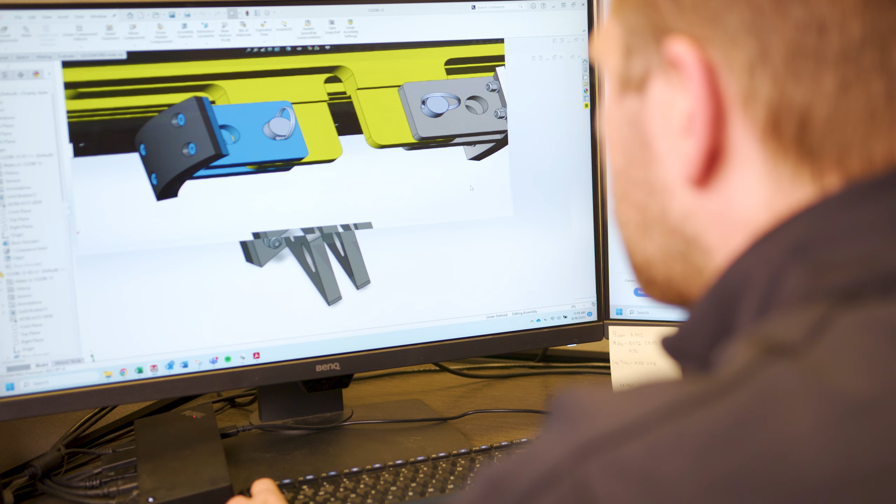My name's Dan Sherwood. I'm a below the hook product specialist based out of our Cleveland, Ohio location. My name is Dan Fisher. I'm a design engineer with the Below the Hook group. And on this specific project, I was tasked with designing this lifter based off a design that the customer already had.

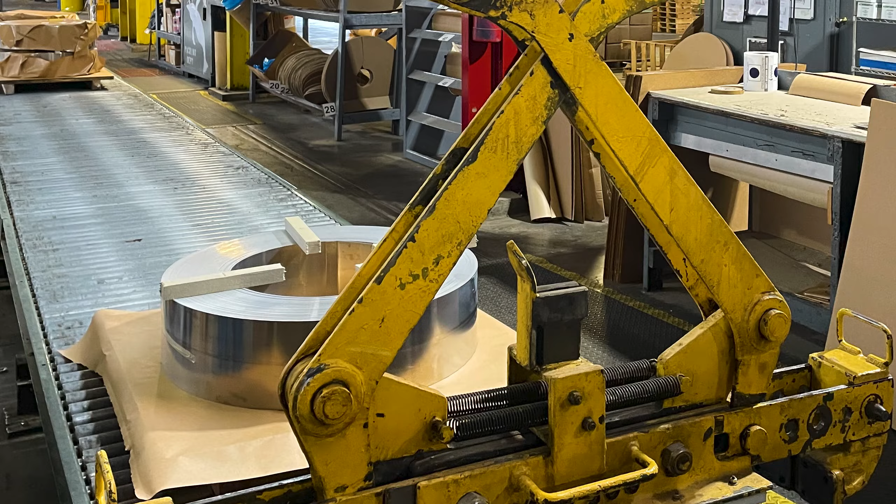So the situation we came into in this one was one where the customer was lifting coils of steel, but instead of the coils of steel being in the vertical position, they were laying down in the horizontal position, which is a much more challenging pick to do. There's fewer options out there to do something like that. Again, most of those are designed to kind of go in and help stand that coil up to move it, whereas this customer wanted to leave the coils in that horizontal position.

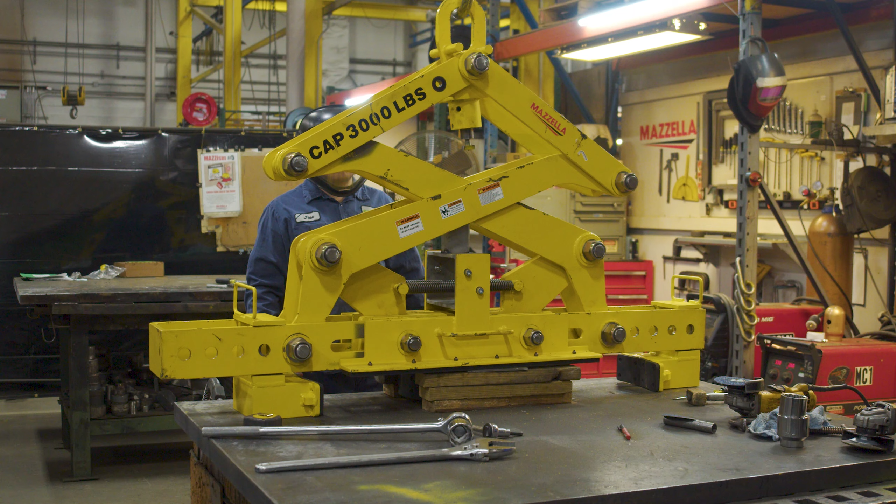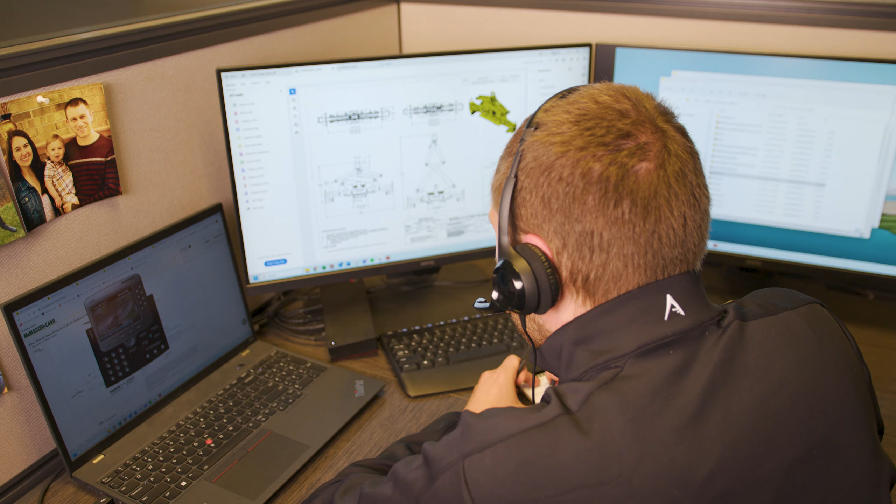So what we needed to come up with was something that we could go in and grab that coil, pick it up and move it, but the problem is as it's a coil of steel, if you just kind of pick up and push on the ends, as you lift it up, you're gonna have a telescoping effect where the center of the coil can fall out. So what we had to do was come up with a device that would apply the correct amount of pressure to both the outside and the inside that would keep that coil bound together, but at the same time

not damage the coil. It was determined that they wanted something very similar to what they had. And with Dan Sherwood's experience, as well as other engineers on the team, we were able to put together something that replicated what they had, while also giving them a brand new lifter that they can use in the future.

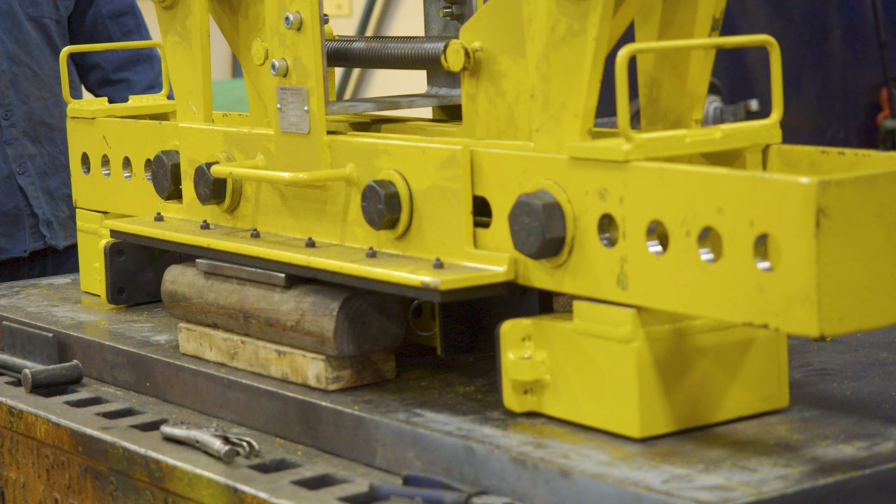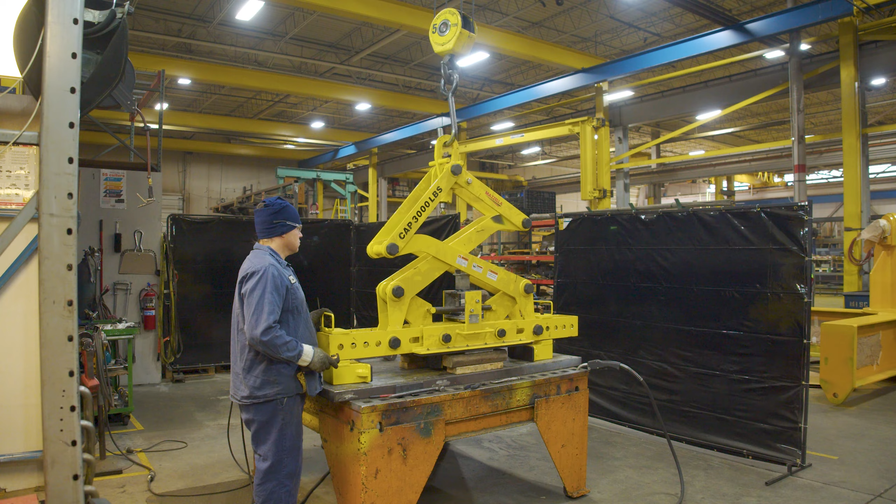Some of the challenges we encountered were having different outside diameter and inside diameter coils, and having the tong be able to work for a couple different size coils. The engineers got really creative with some adjustability features in the tong to allow us to pick up different size coils on it. Definitely a lot more moving parts, a lot of tong arms moving different directions all at the same time. Whereas a lot of the stuff we do is just a standard lifting beam with no moving parts. This definitely took the moving part to the extreme.

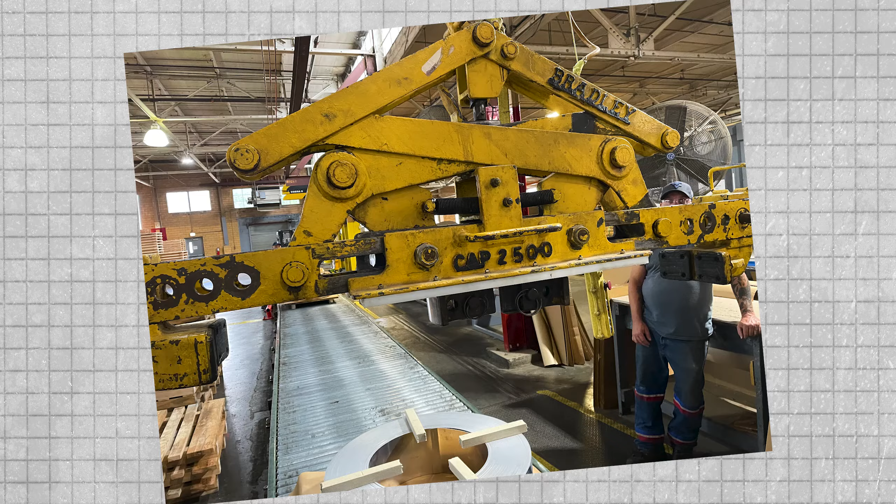To get this device designed, it required a site visit onto the customer's facility to gather a bunch of measurements. We had not much to go off, just a couple pictures and a few dimensions. Then from there, I looked at the pictures and kind of eyeballed how big the thing should be, while also making sure it fulfilled the calculations required by BTH-1.

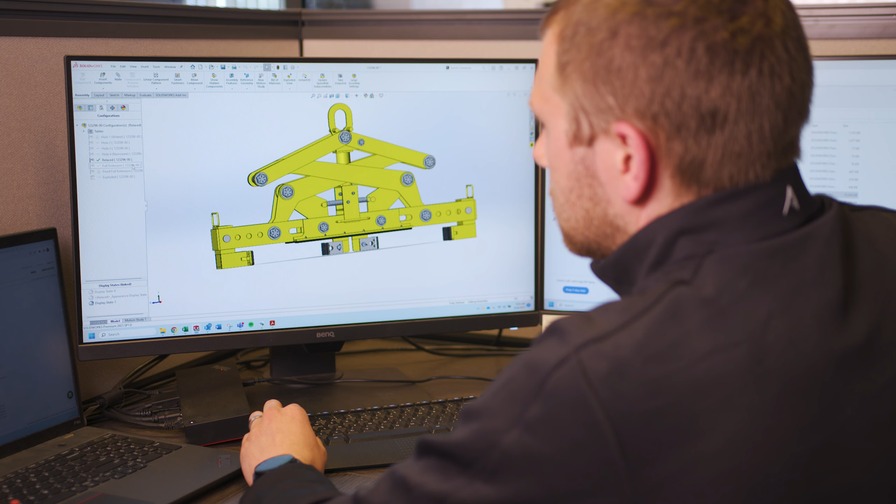So here's the tong in the relaxed state. The auto latch is engaged, so they will drop this down on top of the coil. Whenever it's sitting on top of the coil, the auto latch will disengage as the crane hook is pulling up here. And as it pulls up, these inner pads will move out and the outer pads will move in, which will result in the tong in this state right here.

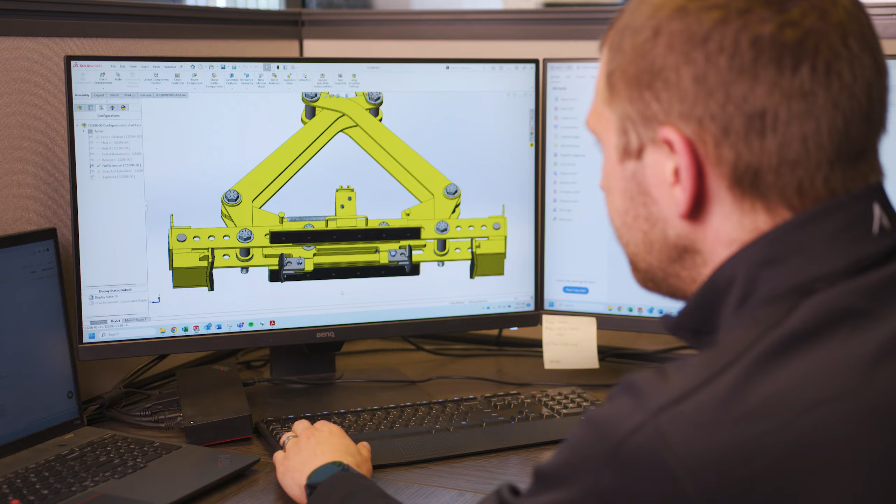So at this point, the crane hook will be picking up from the top, and these inner pads will be pushing along the inside of the coil. These outer pads will be pushing on the outside, and that pressure will allow the tong to lift the whole coil up off of wherever they're picking it up from. Any coil handling customer out there, a lot of times it's the narrower coils that they're picking that this would be great for, to look at using it.

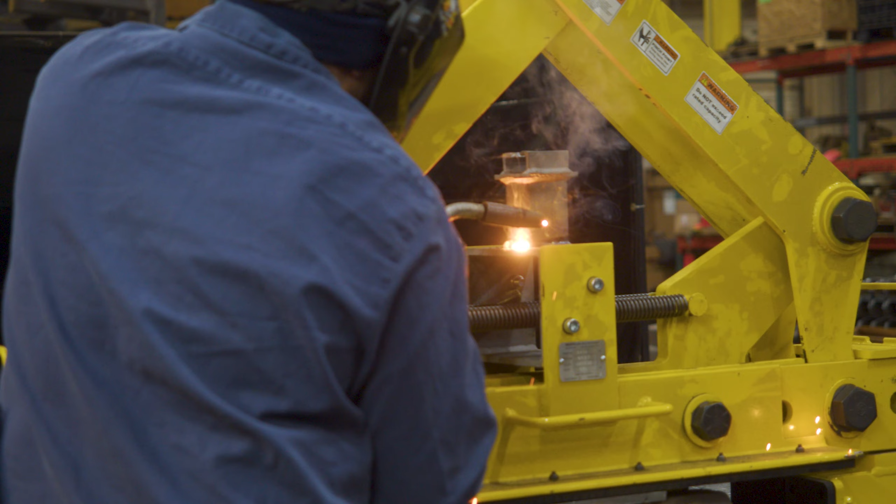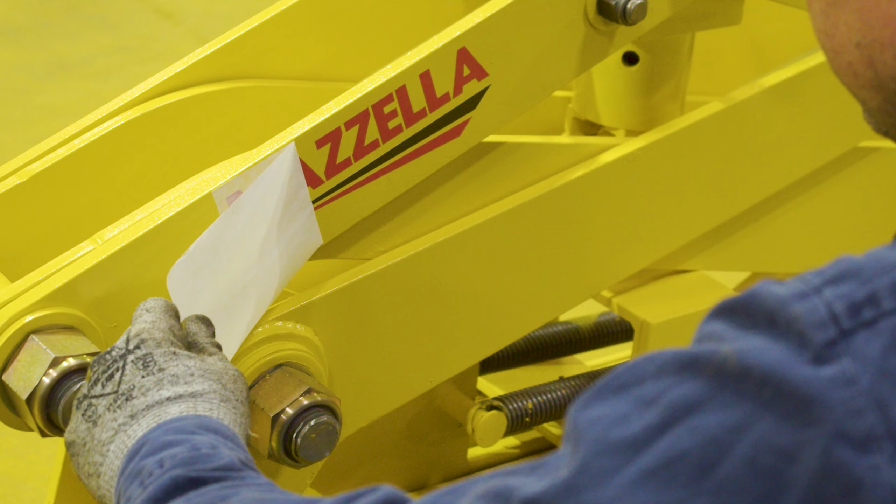We're not just looking to sell them a product, we're looking to form a partnership with them throughout the entire build of a project. It's not, hey, give us the information, we're gonna give you a product. It's, hey, walk me through your process. Tell me what you gotta do. Tell me what your struggles are, what you'd like to see out of this. We're gonna partner with you guys to ultimately try to give you the best working solution, something that's gonna make your lives easier, your jobs faster, safer, and not somebody that was just gonna build them something, drop it off and say, here you go. Somebody that was gonna be in it for the long haul with them.